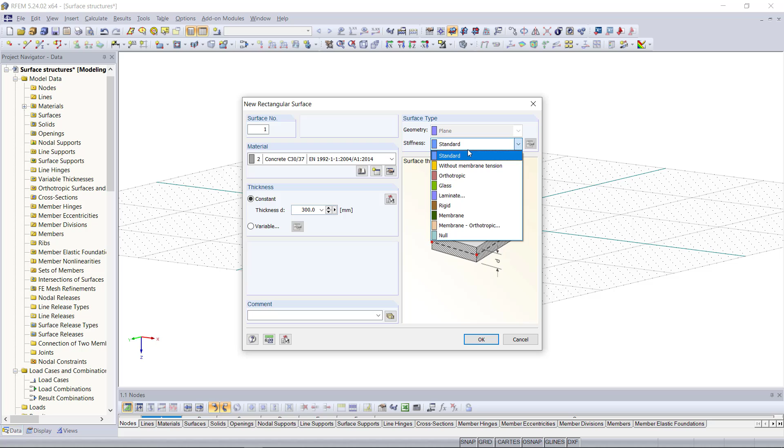And then under surface type, we can choose some additional options regarding the stiffness and with that structural behavior of the surface. We can choose, for instance, without membrane tension, or we can choose a rigid one. But for our example, we don't need that, so we will stay with the standard type.

With clicking OK, we can select 2 points in the graphical area to create the surface. Up here, we can change the view to the top view. This makes it just a little bit easier to snap those points. So the first node will be at 0 and 0, and the second one at 10 and 10.

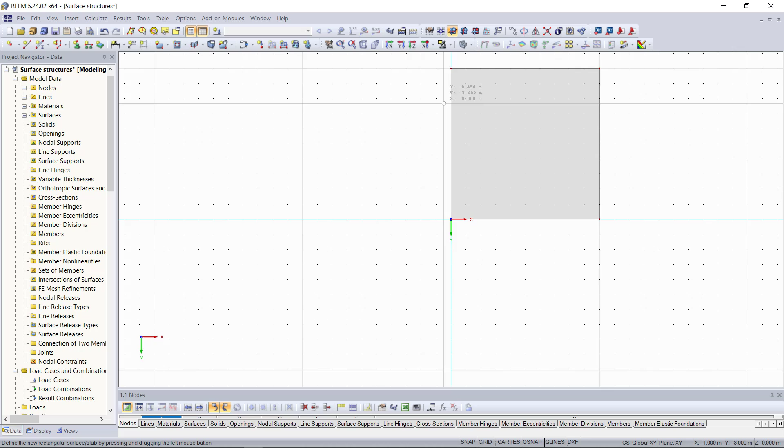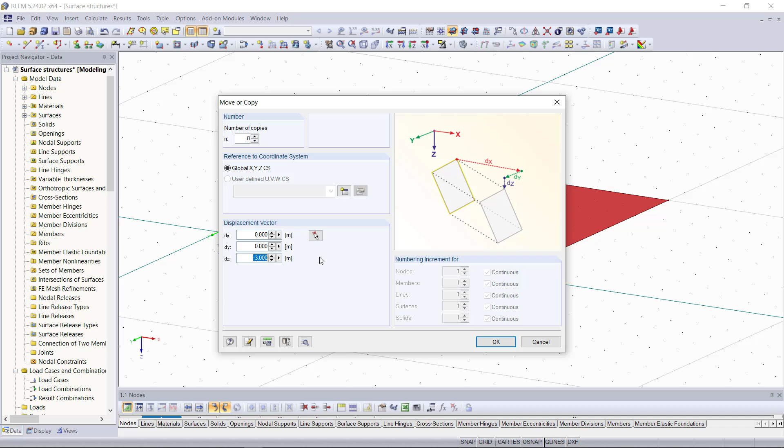Then we will move the surface with an offset of 3 meters along the z-axis. For that, we use again the copy and move command, which we can find in the toolbar, or we can also find that with right click on the surface. Since we don't want to copy this one, we can keep the number of copies as 0. And in order to move it, we just type in the z direction -3 and then click OK.

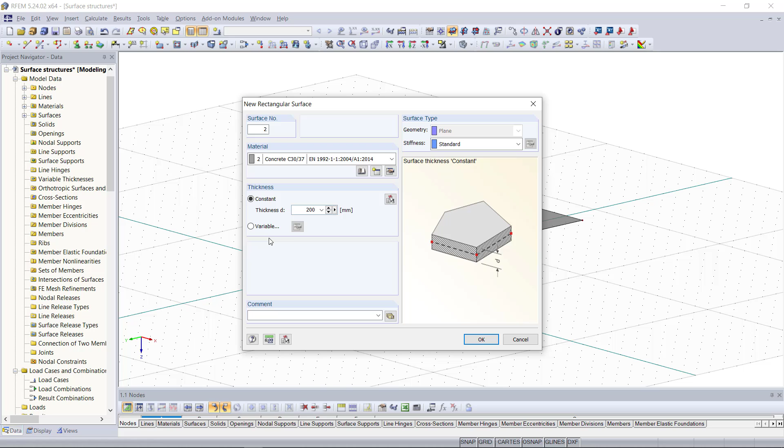Now that we have our slab, we will create 4 more surfaces, which will be our walls. And for that, we click again on new rectangular surface. In the new dialog, we can keep the previous settings except the thickness. Our walls will have a thickness of 200 millimeters. And then we can graphically insert them along the edges of the slab. A great help during modeling these surfaces is if we change up here the plane, we can easily snap those points and create those surfaces.

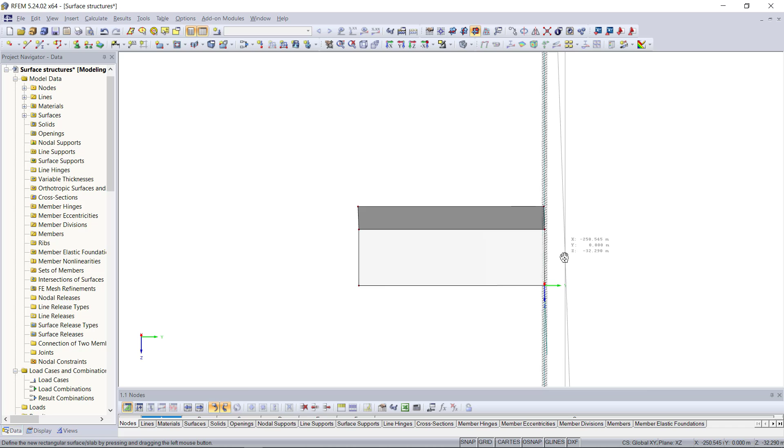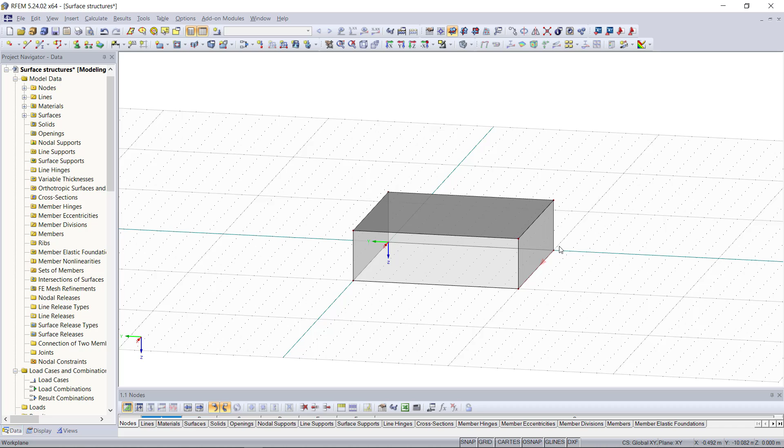Now that we have our structure, we need also some supports. And for surfaces like walls, in order to create the supports along their edges or along the bottom lines, we can find up here the symbol called line support. And we will choose hinged ones, and then with clicking OK, we can assign these very quickly to those lines.

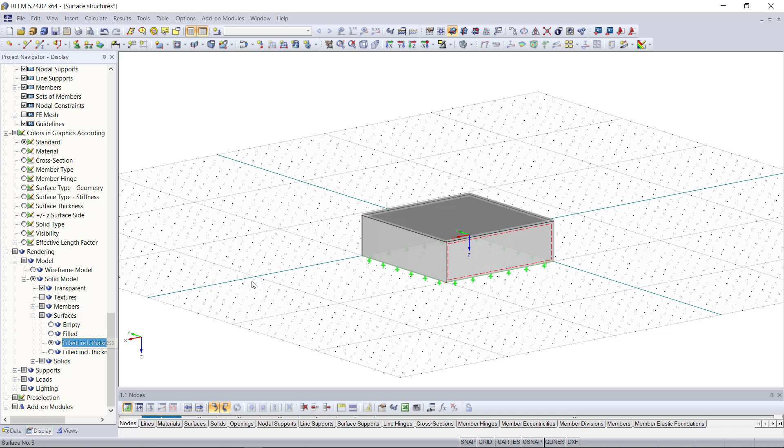You might notice that there is no thickness displayed for the surfaces that we've just created, although we've entered a thickness back in the surface dialog. So this is just a view setting. We can get it displayed if we go to the display menu and then choose rendering. Under model, here we can choose filled inclusive thickness. Just as a hint for you, and as we can see it now in the graphical area, the thickness is rendered on these surfaces.

So we are almost finished with our structure. Just for more stability, I'd like to create a column in the middle of the slab. For that, we will divide it into 4 identical surfaces so that we can get the middle node for the column. And then later, we can also apply a load on each of these surfaces within 4 different load cases.

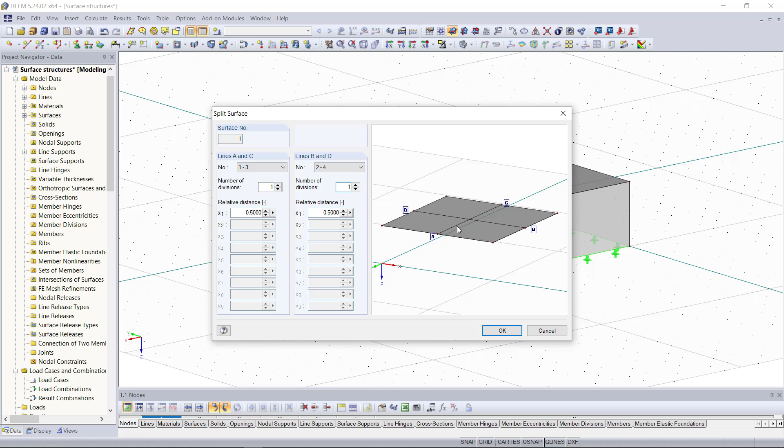So with a right click, we can select the option called split surface. And if we enter in both directions 1, we will get 4 identical surfaces, as we can see in this picture here on the right side. And now we can create the column at this middle node of these surfaces. So we will select new single member up here, and then as cross section, we can enter a rectangle with a height and a width of 300 and concrete as material.

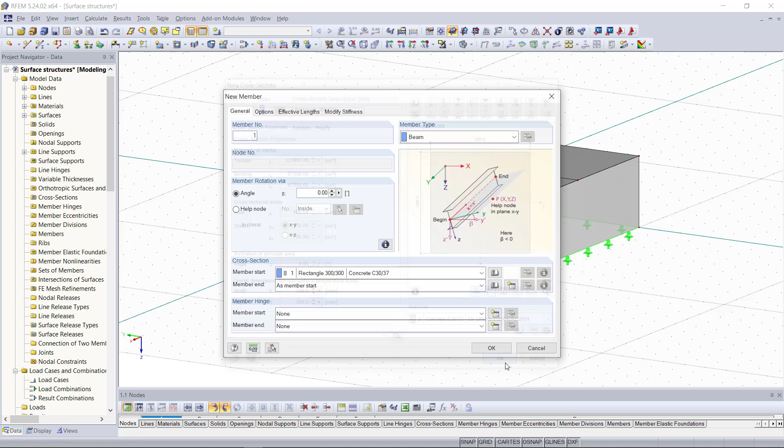And then we will add also a nodal support to this column. Now that we have our structure complete, we will move on to the load cases and loads. Before we get started with defining any load case, we will first go back to the general data. The dialog for that we can open up with right-click and then select general data.

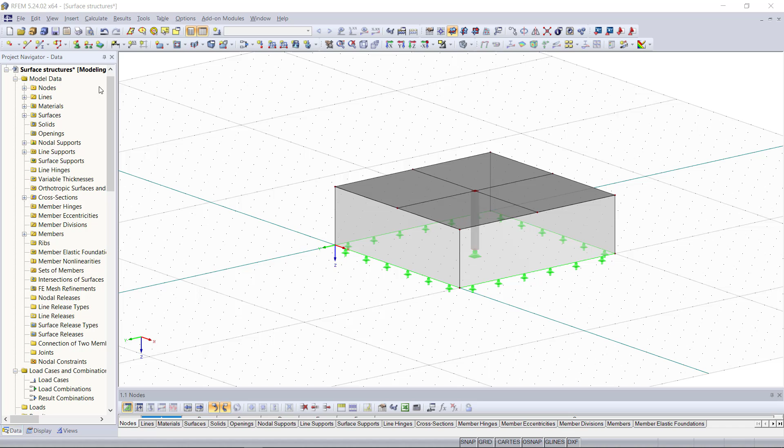What I want to do here is to activate the option called create combinations automatically. So first we can determine the standard type, for example, the European one and the German national annex for it. And then we can activate this option here. This will allow us that the load combinations of the load cases that we will define later are getting generated automatically, since we have this time a couple of more load cases than usual. And with OK, we can close this dialog and start defining the load cases.

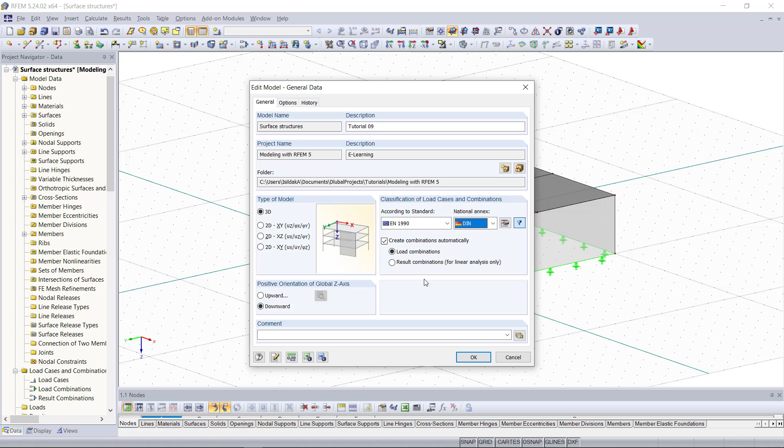So the first load case is, as usual, the self-weight, and then we will create 4 more load cases. Assuming an office building above our slab, we will choose this action category here, and let's say we call this one surface load 1. Then we can copy this one 3 more times and rename them to surface load 2, 3, and 4. And then we can assign a surface load for each load case with changing the surfaces.

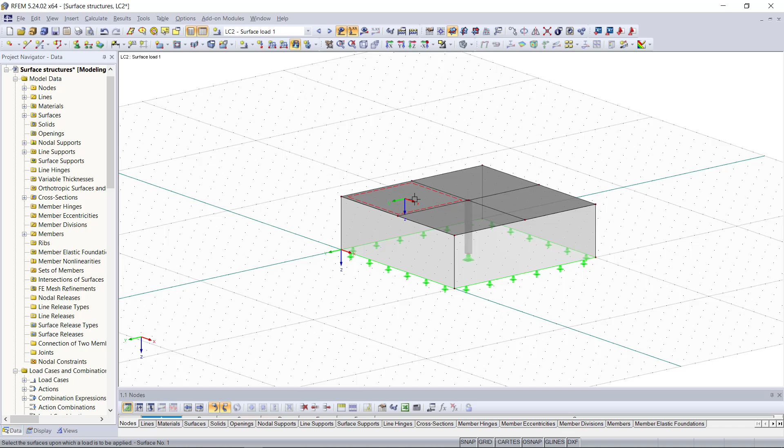So we will choose the right load case up here and then click on this button called new surface load. Similar to the dialog for a distributed load, we can keep load type as force. The direction will be global z direction. As a load parameter or magnitude, we will enter here 2.5. And then we can apply it to each surface.

With the loads applied, we go once again to the load case settings, and under combination expressions, we can set all possible settings for creating combinations automatically. There is, for example, the option called reducing number of load cases, which can be very useful if you have a couple of more load cases than we do right now. It allows us that the number of combinations is getting reduced to the essential. Otherwise, RFEM would create every possible combination, even if it's not decisive. In our case, since we only have 5 load cases, we don't need to activate this option here.

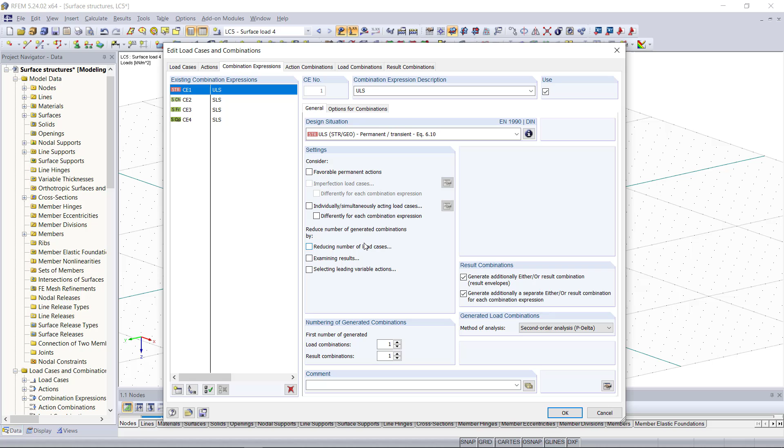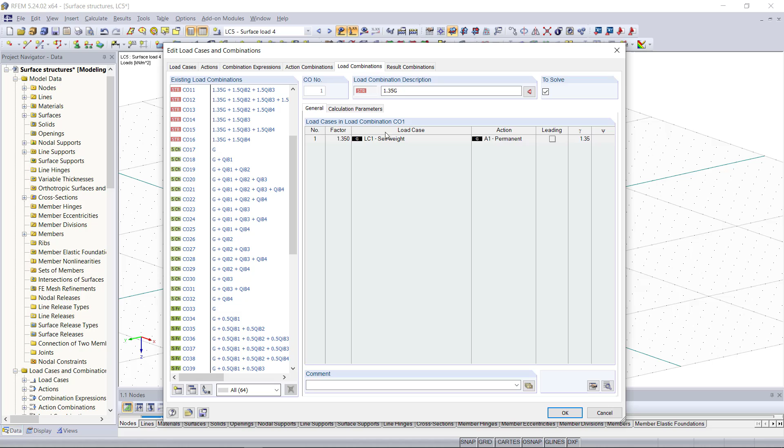Then in the next tab called action combinations, we can define and edit the action combinations according to the standard or standard type, including the serviceability limit state and the ultimate limit state. Next, under load combinations, we can see the load combinations, which are generated automatically, and if necessary we can also edit them. Right now, for our example, we have in total 64 different combinations, as we can see here. And then the last tab is called result combinations. A result combination superimposes the results of load cases, load combinations, or result combinations according to the preset combination expressions.

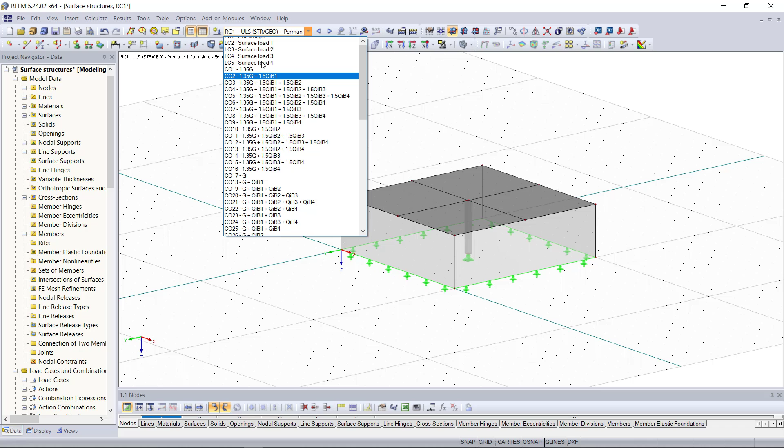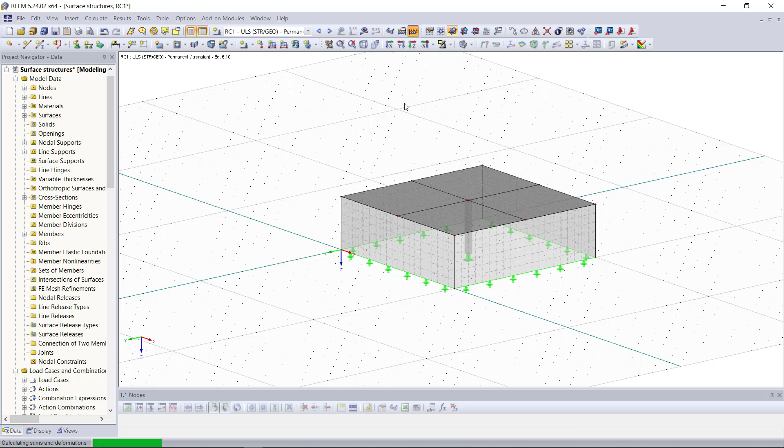If we click OK, we can have a look at all combinations up here and then check if the load cases were combined as we like. And then we can run the calculation for our system. And since we have a couple of more load cases and combinations, this will take just a little bit longer than usual. Now we can display the internal forces and deformations for each combination which we choose up here.

So this was our tutorial about modeling and calculating surface structures, and the next video will be about modeling 3D structures.